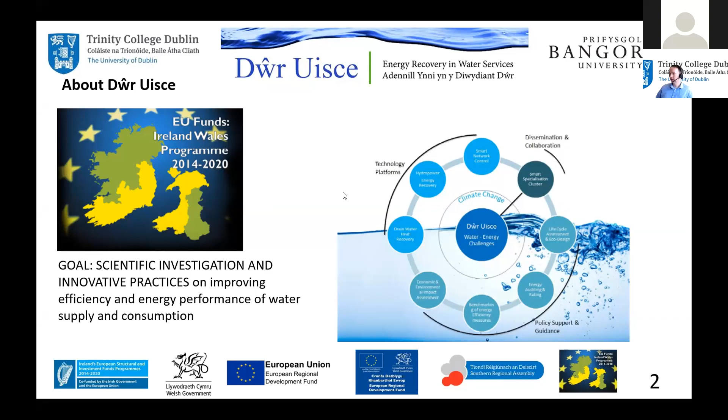In terms of the webinar series itself, starting today, our topic is again on low-cost modular hydro turbines, and I'll mention a bit more about that in one second as an introduction. But we'll also have a couple of other webinars happening later next month in March, and also one in April, on those other themes of the project to do with heat recovery and wastewater. So we have two of those, one on the opportunity to recover energy and one on doing it in practice, and also a webinar on benchmarking of water utilities in Ireland and Wales.

So the topic of today's talk is on low-cost modular hydropower turbines. So where this originates is from many years of work within this Dŵr Uisce project, and also some preceding ones, which were also funded by the previous Interreg Ireland Wales programme, which looks to try and come up with technology that can, in an economically viable fashion, exploit some of the small hydropower opportunities that are available in water networks. So we've known that these exist for many years, but conventional turbines are generally quite expensive when we get to the scale of hydropower we're talking here, which is generally less than 20 kilowatts or something in that region. So I won't give away too much of the details of all of that. I'm going to leave that over to my colleague Daniele.

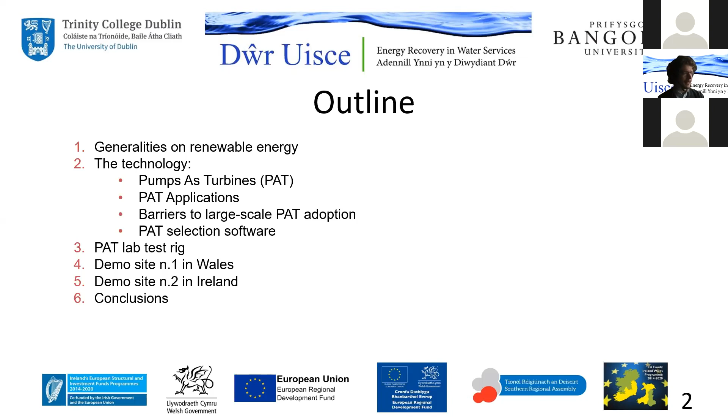So in terms of what my short presentation covers, we're talking about just a few general points about renewable energy, especially on the small scale. Then we're going to go through the technology that we've been developing and testing in the various projects with Trinity College and the various partners. And then discussing also the lab tests and the practical application in the two Dŵr Uisce demo sites.

So in general, as we all see, there is a growing trend of the penetration of renewable energies in the market. There is an even more widespread application of those, and this is going down especially to the small scales, not only on the utility scale. So we are talking a lot about an increase of distributed generation. There are many technologies available, but most of the small scale, micro scale installations nowadays are made especially with solar PV or small wind turbines.

And those two are types of devices that in the last decades or so have dramatically decreased in terms of investment cost, and have been modularized and made available more or less off the shelf, even on a small scale, even down to domestic applications at a reasonable and ever decreasing cost.

At the same time, hydropower is a very mature technology that has been around for over 150 years or so in the current form. However, historically it has been applied to large power stations, and even nowadays almost the entirety of the hydropower turbines available for purchase are custom made. They have a specific engineering design to suit the conditions of a particular site. And therefore the high resulting investment cost due to this customized manufacturing approach has largely hampered the diffusion of micro and small scale hydropower in comparison to solar PV or wind turbines.

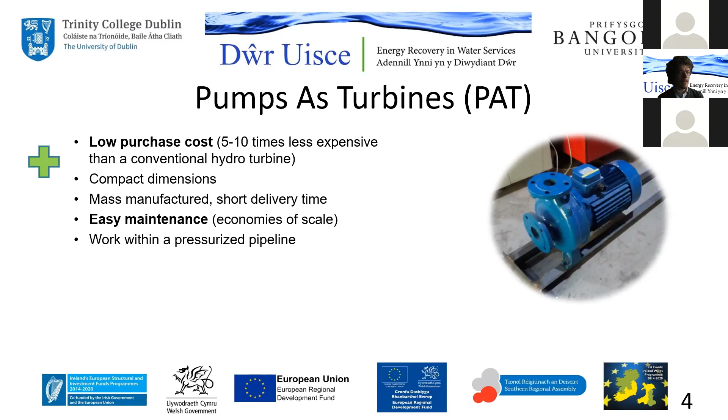They are mass manufactured products with short delivery time and very easy maintenance, thanks to economies of scale, and also with spare parts available at very short notice. And also these devices can work in a fully pressurized pipeline, therefore allowing for back pressure downstream of them.

Despite this, however, there were a number of challenges that we had to face. For instance, the lower efficiency at partial loads with respect to custom turbines, which made the design and selection of these devices very critical. And then a series of uncertainties, which are down to the fact that these devices are sold as pumps and not as turbines. So in most cases, their performances are not available from the manufacturer. And at the same time, we were facing an absence of proven or established design guidelines for installations with these pumps as turbines.

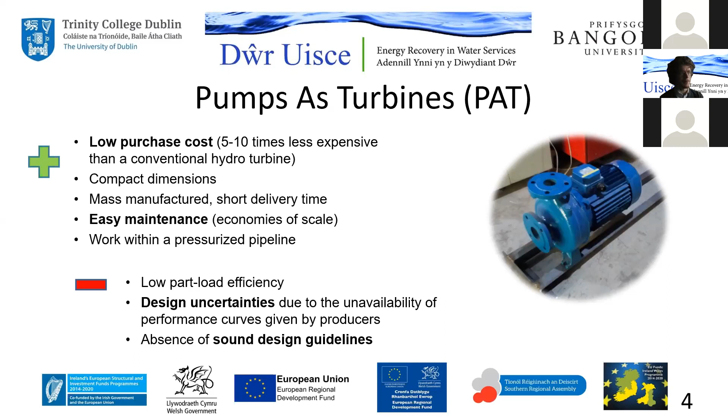And just to give an idea about the power range we are talking about, we are mostly focused on the less than 100 kilowatt scale, which is enough to power a dozen or so households. However, these devices can also be applied on the household or pico generation scale with less than 5 kilowatt. You will see that the two pilot sites that we've built with the Dŵr Uisce project fall under this category. However, it's kind of an extreme boundary. And at the same time, these devices can also be applied for larger powers, even larger than 100 kilowatt.

However, only on special applications, for instance, when the working conditions are pretty much fixed in terms of flow rate and pressure available.

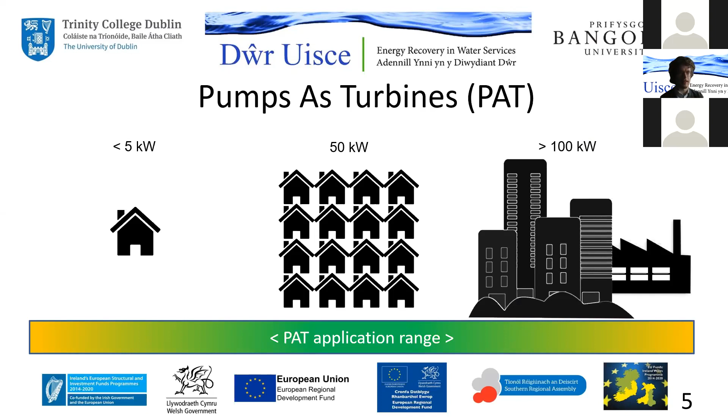In terms of applications, there is a very wide range of applications for these types of devices, and there have been some sporadic examples of previous installations over the last decades. For instance, those are the devices that can be installed.

These pumps as turbines can be installed for more traditional run-of-river hydropower, where there is an intake on a water stream and then an elevation difference that can allow the designer to install a penstock to create a pressurized column of water and then feed it into the turbine in the powerhouse. So it's a quite traditional, let's say, hydropower scheme, even though, of course, here we are talking about rather small power output.

And this type of inexpensive and easy to maintain device is therefore particularly suitable for rural electrification in developing countries, where access to particular and more specific hydropower spare parts of custom turbines is more difficult, and so on.

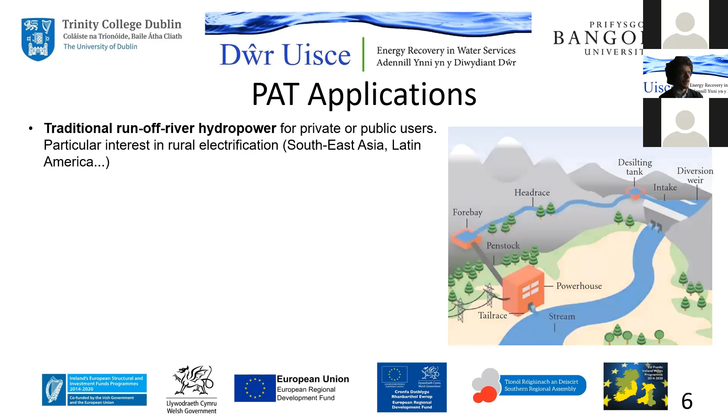Then another application of these devices is energy recovery from existing pressurized networks, where basically in every water network, whether it's drinking water, cooling water, a mine supply system, and so on, there will be a number of control valves, here indicated, or pressure reducing valves, PRVs, which basically create a differential in pressure between upstream and downstream.

And this type of potential can also be exploited by installing a turbine in parallel to those valves, so instead of dissipating that potential as heat and noise, you could recover part of it as electricity. And as I mentioned, there is a big variety of applications, basically whenever you have water moving around in pipes.

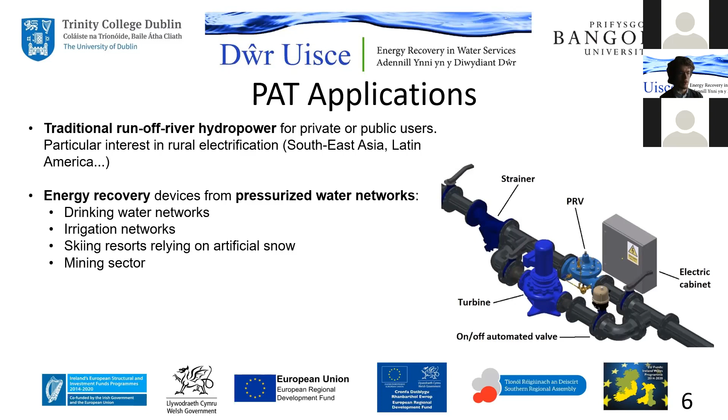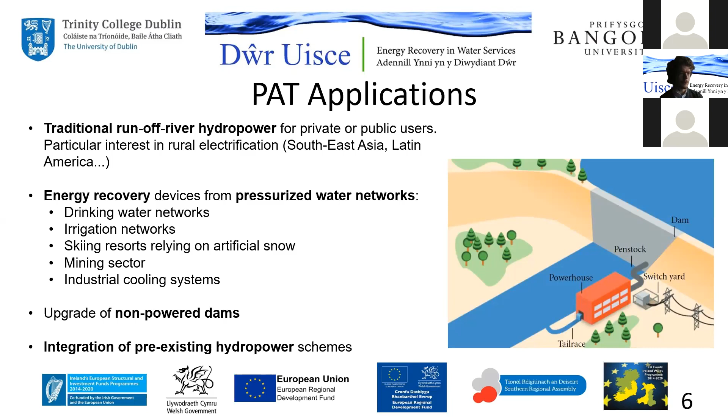Other uses of this technology are to upgrade hydropower or general hydraulic infrastructure which is not currently being used for power generation, but also to integrate existing hydropower schemes, for instance, to generate some base load of power during the dry periods of the year when the main turbines have to be switched off.

However, when we started looking at this technology, we started interacting with a lot of policy and industrial partners, and eventually found out that there were some barriers to the adoption of these devices. So we started our investigation by asking why we don't have these pumps as turbines already implemented everywhere. And we basically boiled that down to three aspects.

So from the point of view of the device manufacturers, the pump industry, we didn't find a big interest at the time when we first contacted them in the use of their pumps as turbines, essentially because it's a different market than the one they are traditionally used to, and they see that as marginal.

Then on the side of the hydropower designers, consultants and practitioners, there were a series of highlighted concerns. We found first of all a general unawareness of the possibility to use these devices instead of a conventional turbine. Then a general lack of experience with them, and also the presence of feed-in tariffs that were granted to hydropower installations in most European countries until a few years ago. They were favoring very efficient turbines, since the remuneration was very attractive for the kilowatt hours generated.

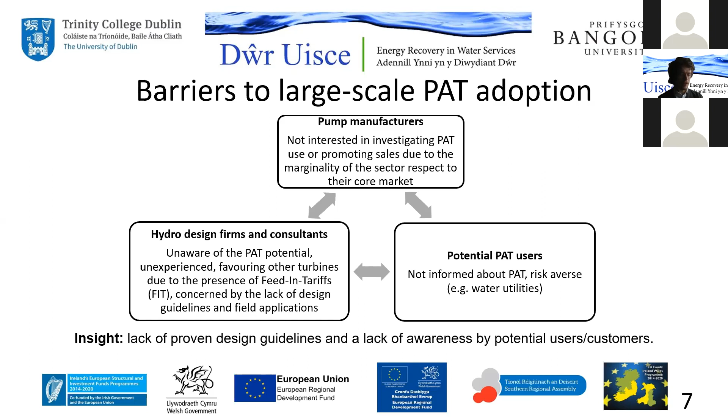And finally, on the side of the potential users, mostly industrial users, for instance, water utilities, we found a general risk aversion and again a lack of awareness about the possibility of generating power by means of these devices.

So as a first thing, we tackled the problem of the selection of the most ideal pump-as-turbine for a certain site. I'm not going into the details, but you can imagine that there are thousands and thousands of conventional, off-the-shelf available water pumps that you can buy from many suppliers. And probably a good number of those, if installed at a particular site, will output some power, but as I mentioned, the efficiency at partial loads tends to decrease quite dramatically as you move away from the optimal working point.

As a result, it's critical to select the one or two models that are most suitable, that can give the highest electricity yield, that can minimize the payback time and maximize the carbon savings over the lifetime of the installation. And therefore we set out to work on a design software that allows the selection of the optimal pump to be used as a turbine for a given site.

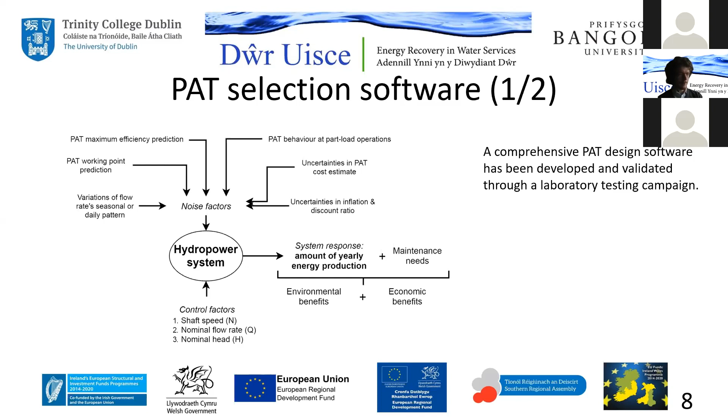As you can see from the scheme, this takes into account a variety of factors which are both technical and related to the fluid and hydraulic dynamics of the device, but also economical, environmental, and so on. In the end, what this software does is, taking data from the catalogs of pump manufacturers, it enables a visual choice according to a variety of parameters. For instance, the electricity yield, how many kilowatt hours you can produce per year, or the payback time, and so on. It allows the designer to have visual feedback of which ones are the optimal pumps that can be chosen to work as a turbine for a given site.

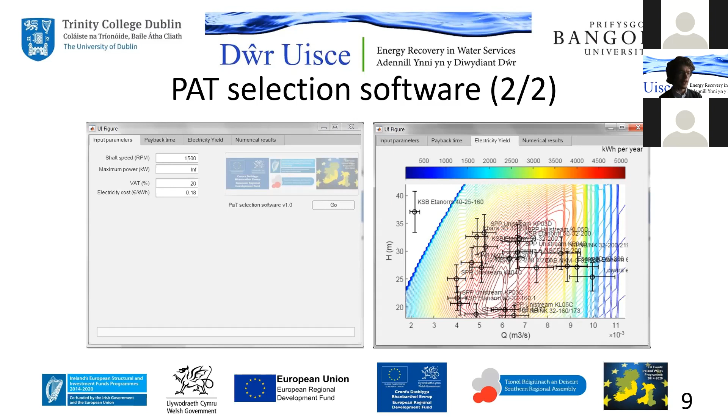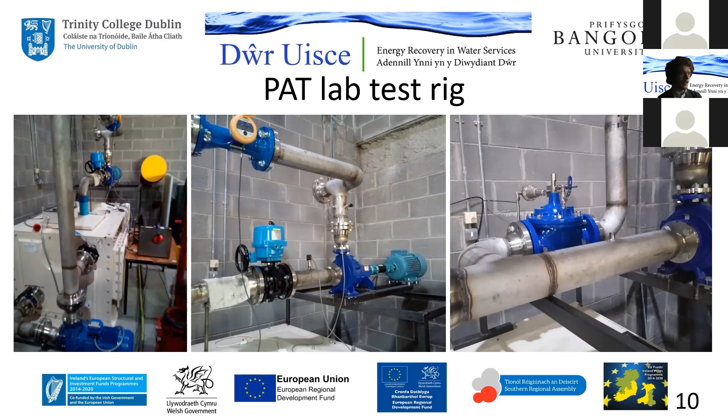In order to validate the results from the software and to get confident in the design of the demo sites that I'm going to talk about soon, we first set out to build a hydraulic test bench for turbines and valves, located in the civil engineering facilities of Trinity College in Dublin, where we have tested a variety of different configurations of valves, turbines, generators, and so on. All of this knowledge then went into the design of the two pilot plants, the two demo sites.

The first of them, located in Wales, has the look of traditional hydropower, in which we have a natural body of water, a small stream, from where we've built an intake, which diverts a portion of that water into a buried pipeline, and then 300 meters away into the turbine, hosted by a small powerhouse, and then back into the original river.

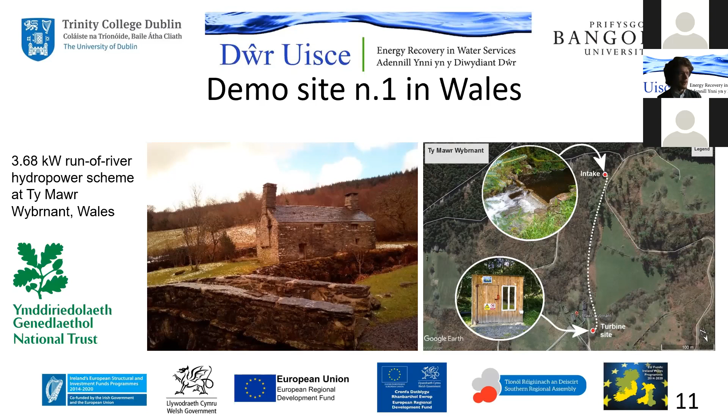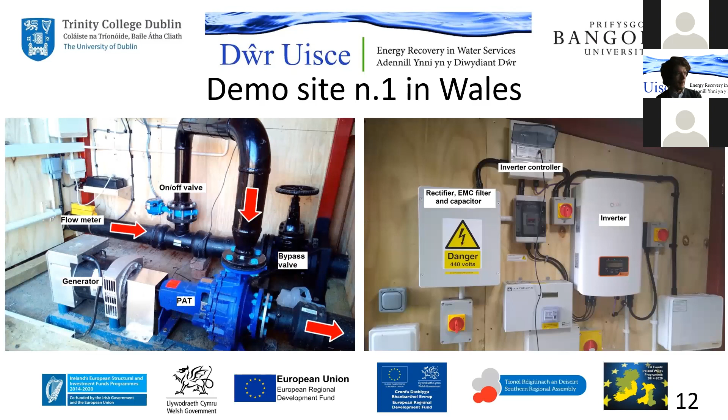In terms of power output, we were below 5 kilowatts, which is more or less a household type of generation plant. Here you can see, by the way, the internal side of the powerhouse with the turbine and the electrical devices. The timing was very fortunate, because when we got in touch with National Trust, they were already planning to develop this hydropower installation at the site.

The options they were considering before getting in touch with our team were either a set of 3 Pico turbines, a type of standardized turbine that can output just over 1 kilowatt, or as an alternative, a conventional Pelton turbine, which is one of the classic types of devices for hydropower in general. At that point we stepped in and suggested instead a third way, which is using a pump-as-turbine type of device.

In the end, the configuration chosen was the one with the G83 connection standard, which was later upgraded to a different one. You can see that in terms of cost in pounds, there was a big difference, especially between the use of pumps as turbines and the custom-made, regular Pelton.

And this cost difference in the devices then resulted in a very large saving on the final price tag of the installation, which was just below 30,000 euros. But most of it actually went into civil works and planning and commissioning, while only just 15% of the number was made up of the turbines, electrical devices, valves, and various bits of equipment.

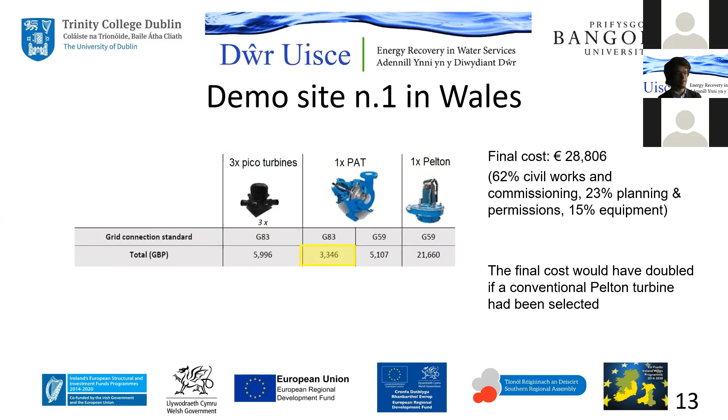However, if instead of 3,300 pounds pumped turbines, they had decided to go for a regular Pelton turbine, then the final price tag of the whole installation would have been almost doubled. And regarding the Irish pilot plant, I'm just going to show a few seconds of video.

What we're trying to do in the Dŵr Uisce project is use the pump as turbine, which you can see over my shoulder here, to reduce pressure in the system. So it also does the same thing as these valves, reduces pressure, but it produces electricity as a byproduct of that. So in this technology, it has a kind of a double benefit. It reduces pressure, reduces the amount of water wasted through leakage reduction, and also generates electricity. And this system is what we have put in place in the Blackstairs demonstration site, and it reduces the energy consumption there by up to a quarter.

And we were excited to hear about this new technology that can harness the energy from the water. And our committee, which runs the scheme, were eager to find out more and to see would our scheme be suitable for this project. So with some exchange of data and more meetings, eventually in 2017 we had a feasibility study done by the Dŵr Uisce team.

And while the feasibility study identified a number of places throughout the scheme that would have the potential to create energy, by far the best place was up at the treatment plant, where there was the great head of pressure and also the volume of flow, which was enough to generate 4.2 kilowatts of electricity. So right beside it there was the treatment plant, which had the use for this electricity. So it's very important to have the conditions to create the energy, but you need a use for the energy nearby. So it was an ideal location.

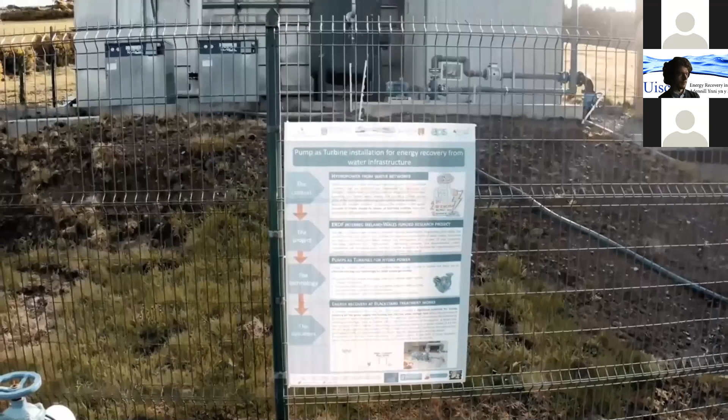Okay, so as you've seen from the introduction, for the Irish pilot plant, we've decided after an initial selection phase to collaborate with the Blackstairs Group Water Scheme and with EPS, that was operating their treatment works, to install a turbine at the raw water inlet from one of their gravity-fed lines.

The steady-state power output that we envisaged ended up to be just about 3 kilowatt, which doesn't sound like much, but covers between 20 and 25% of the energy demand of the water treatment plant on site.

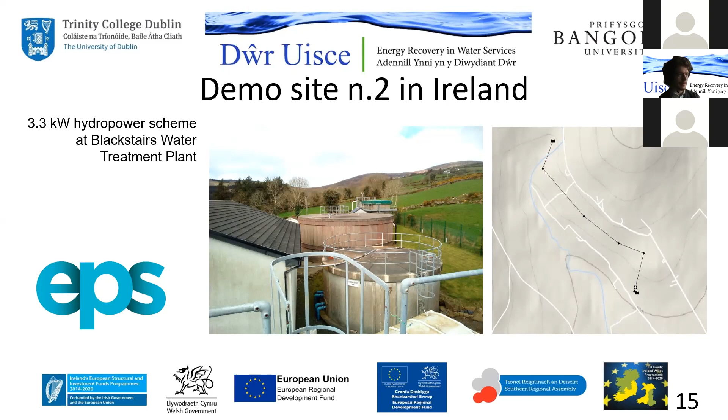And as you've seen from the drone overview from the video, the scheme has a river source, then conveys water into settling tanks. Then there's about a 2 kilometer buried pipeline, and previously water was just splashing on top of the storage tank, as you can see on the bottom left.

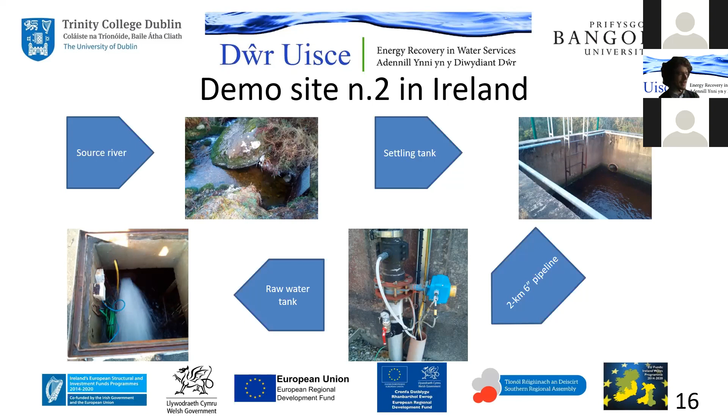So that is the wasted power that we have instead recovered by installing a turbine on the terminal part of the pipeline. So instead of just dissipating it by having the jet splashing inside the tank, we designed this system, which in very basic terms just diverts water into the turbine before ending up in the same tank.

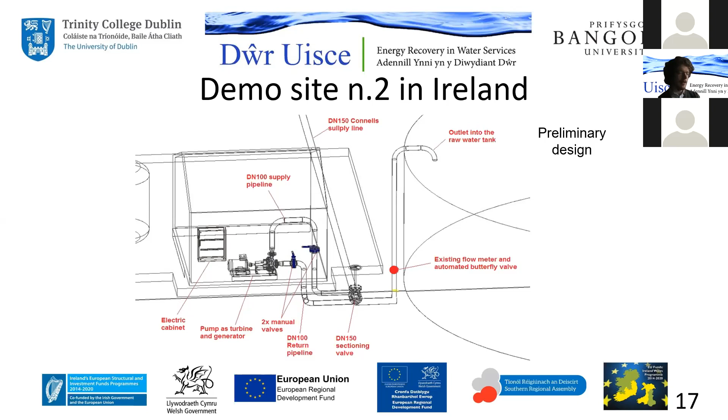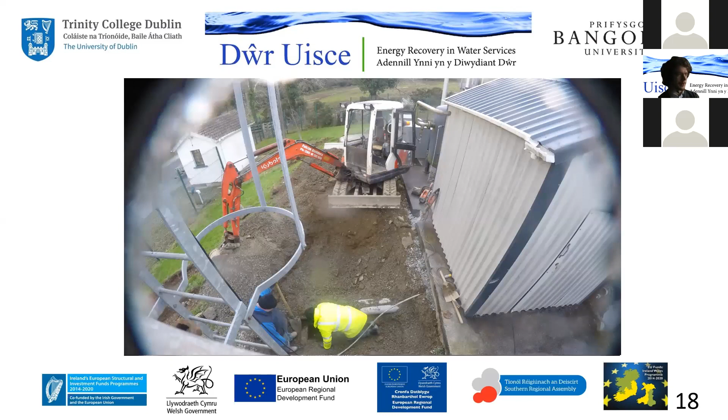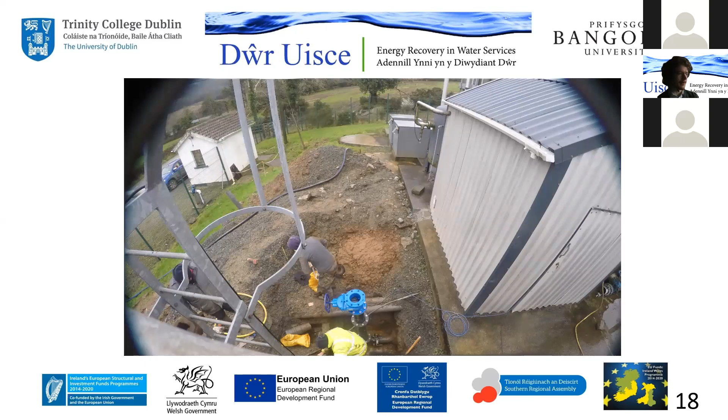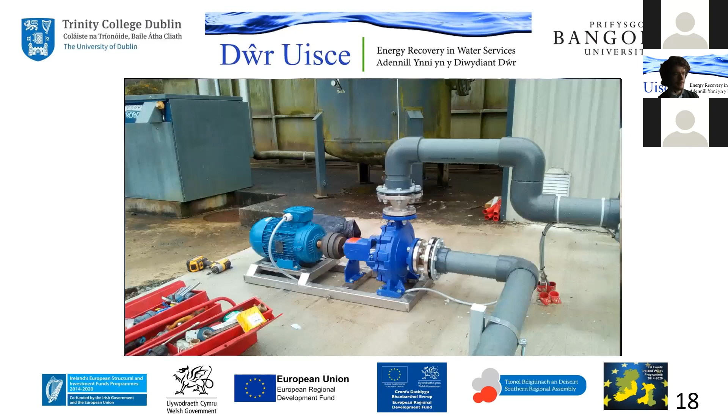And this is just a few snapshots of the construction. So in terms of installation, it was quite straightforward. It just needed some excavation to expose the supply pipe, the installation of a vertical T, as you can see on the bottom, and then just the making of a small turbine support concrete pad. And finally, all the plumbing could be completed. And this is the final layout as you saw from the short video clip.

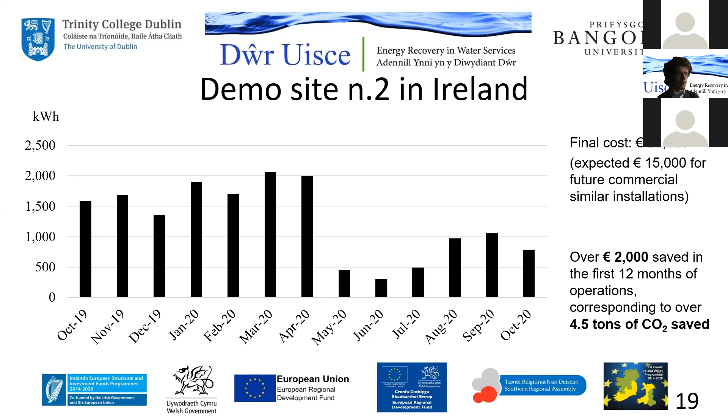However, the first balance from the initial 12 months of operations was very positive, and over 2,000 euros were saved on the electricity, so all the import of electricity that was avoided by the treatment works, corresponding to 4.5 tons of CO2 saved.

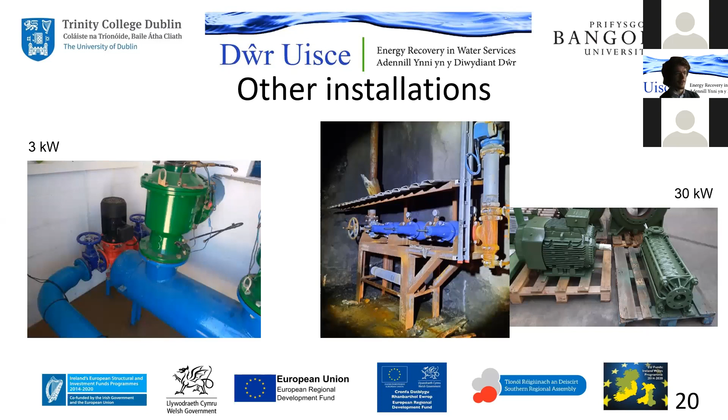And in the meantime, connected to other projects and other settings, the team assembled in Trinity College that I'm part of, with Angus and the other colleagues, has been working also on other side projects. For instance, on a 3 kilowatt energy recovery turbine in a Spanish irrigation network, and on a 30 kilowatt turbine in the water supply of an Irish underground zinc mine. So we started seeing more and more opportunities for feasibility studies and for actual installation of these devices.

So as a conclusion, with respect to the initial challenges that we were facing a few years ago, when we first took a snapshot of the current landscape of the technology and of the willingness of different parties to innovate, nowadays in the course of the Dwr Uisce project we've talked with a lot of pump manufacturers, and we've observed a change in their attitude. Some of them have a much more proactive interest in the use of their devices as pumps as turbines now than 4 or 5 years ago.

And at the same time, by rolling out the design software, by showing the applicability of the design and the use of pumps as turbines in different settings, and of course the 2 pilot plants were instrumental to this, and by all the networking around the Dwr Uisce project, we've been disseminating to a lot of hydropower designers, practitioners, and so on, the use and the advantages of this type of technology.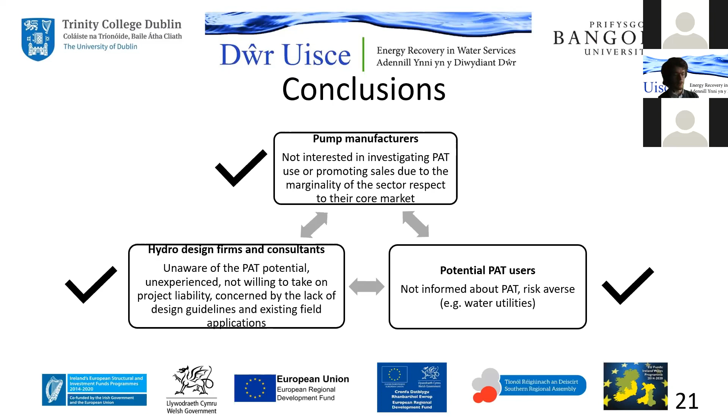And at the same time, with all these dissemination activities, of which the present webinar is a part, we have also worked a lot to inform the potential users, for instance water utilities, landowners, and various hydraulic infrastructure owners, about the potential of this technology towards their decarbonization efforts.